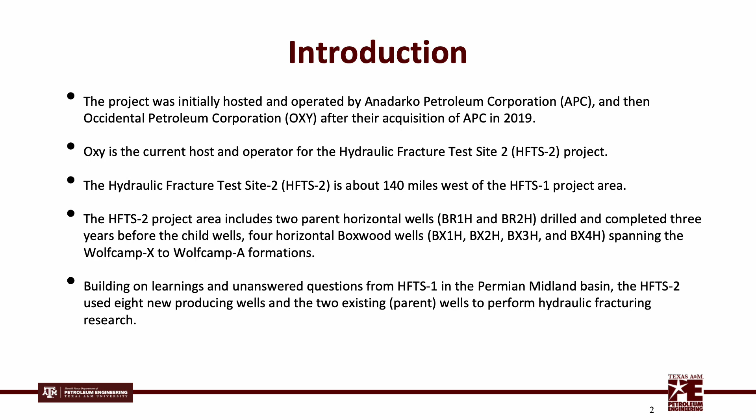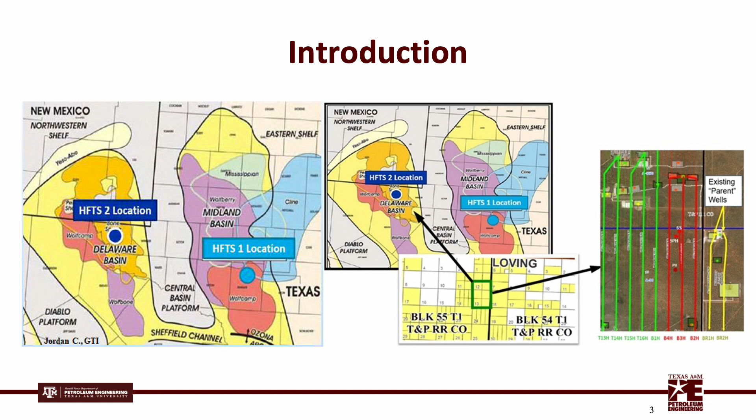The Hydraulic Fracture Test Site 2 project is managed by GTI, with DOE being the primary sponsor and NETL administering and managing the project for DOE and performing specific research. GTI is also responsible for the project and specific research ranging from proppant analysis to data integration. Industry members provide cost sharing to the project in the form of cash or in-kind contributions. Occidental is the test site host and is responsible for managing day-to-day field operations of the test site, including management of vendors and subcontractors for field and laboratory work.

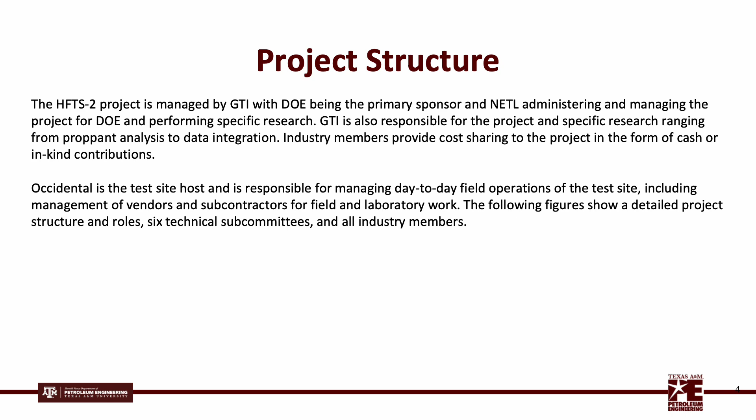The following figures show a detailed project structure and roles, 6 technical subcommittees, and all industry members. These subcommittees were created to provide technical input and direction for specific areas of the project, comprising members from DOE, NETL, GTI, the test site hosts, and all industry members.

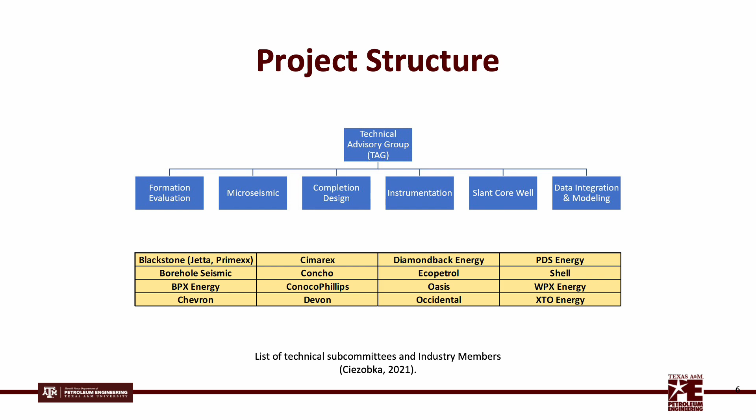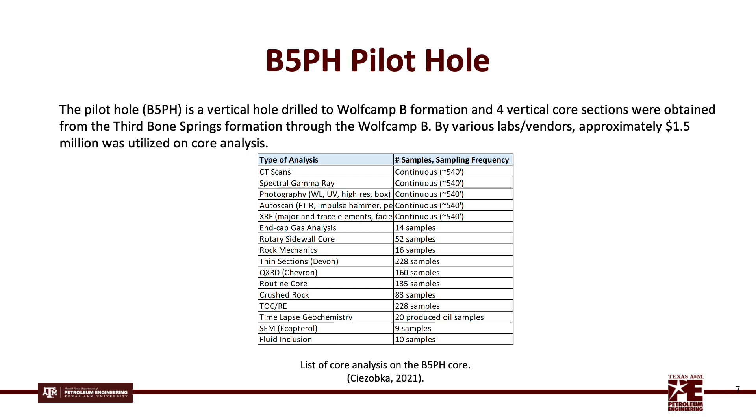The pilot hole is a vertical hole drilled to the Wolfcamp B formation, and 4 vertical core sections were obtained from the Third Bone Springs formation through the Wolfcamp B, by various labs and vendors. Approximately $1.5 million was utilized in core analysis.

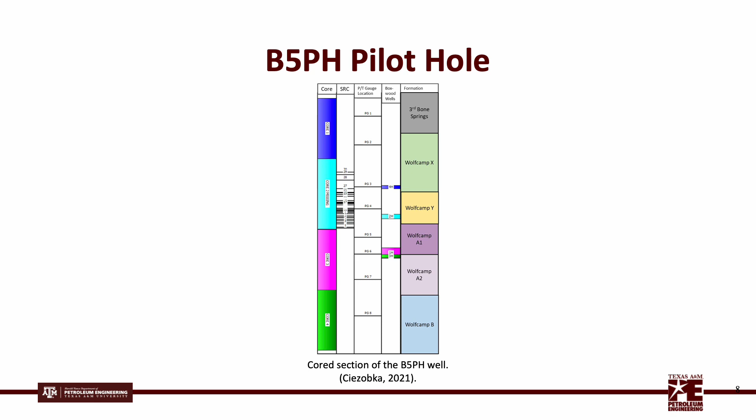This is an image of the depths of various formations and the location of the vertical cores taken in the vertical pilot hole. The location of the cores is the first track from the left. The location of sidewall rotary cores is the second track from the left. The location of PT gauges is the third track from the left, and wellbore locations are the fourth track from the left. The objective of the slant well is to sample the created fractures and to monitor reservoir depletion.

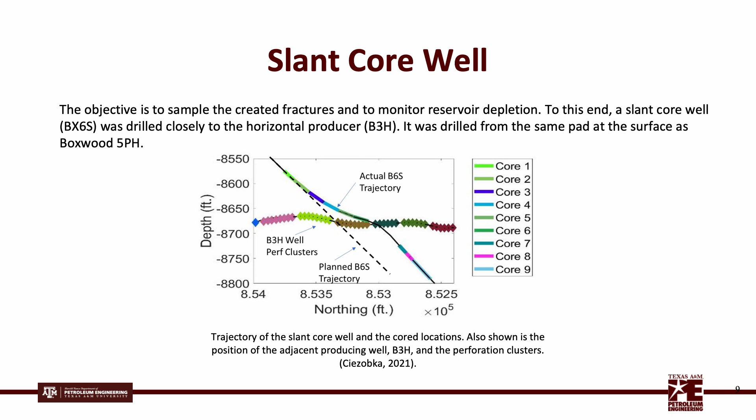To this end, a slant core well was drilled closely to the horizontal producer. It was drilled from the same pad at the surface as the pilot hole. A total of 949 feet of 3-inch diameter core was recovered from 9 core runs in the slant well.

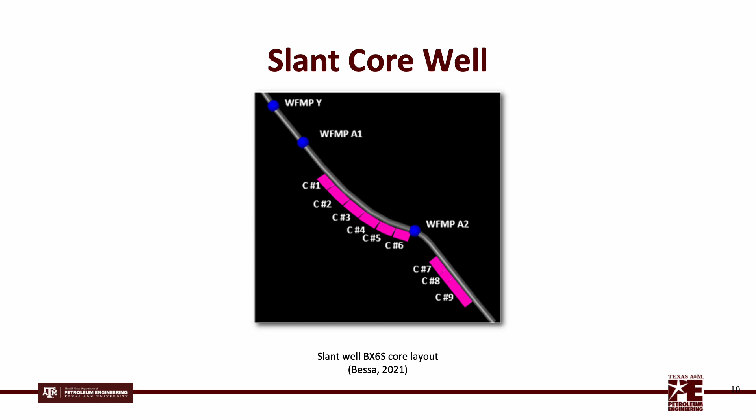Cores 1 through 6 captured rock intervals above the nearby stimulated well, and cores 7 through 9 were from below it. The team followed established fracture description methods as described and deployed in the previous Hydraulic Fracture Test Site 1 project in the Midland Basin.

Hydraulic Fracture Test Site 2 demonstrated advanced FO technologies for stimulation and production monitoring. In the project area, fiber optic cable was permanently installed in 2 horizontal child wells and 1 vertical well. This unique 3-well design enables spatial and temporal hydraulic fracture propagation and production depletion monitoring. This is the first project which utilizes 3 fiber optic wells, including a vertical and horizontal well, to collect FO data.

There are 2 kinds of data obtained from this fiber: near wellbore survey, which measures the response from the activity in the fiber wells, and far field survey, which measures the response from the activity in the offset well.

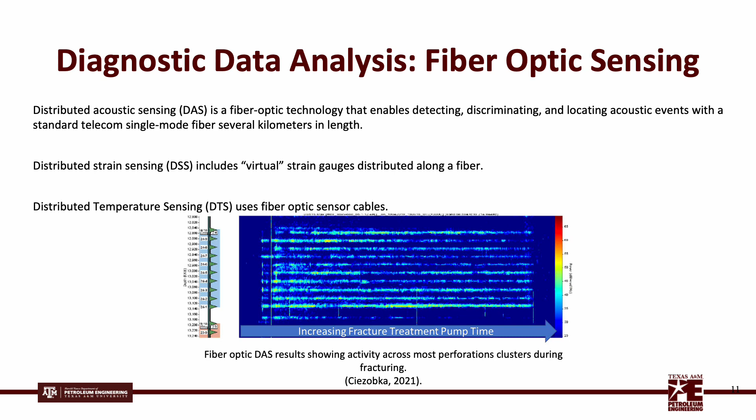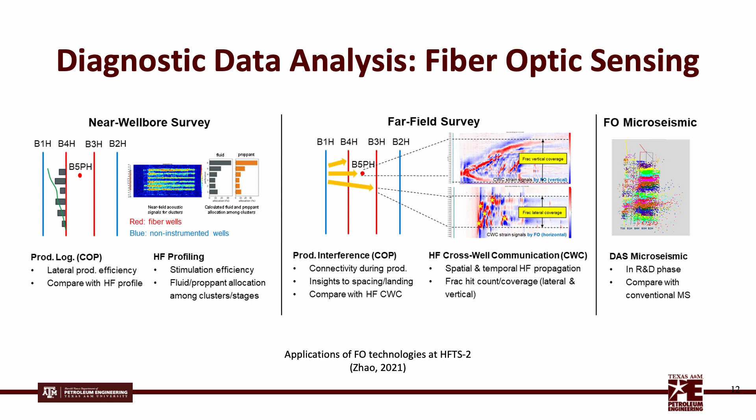Through near wellbore surveys, distributed acoustic sensing and distributed temperature sensing data were acquired during the stimulation of two horizontal fiber wells. Through far-field surveys, cross-well strain data were acquired using low-frequency DAS to monitor response on the fiber wells to activities on the offset wells.

The objective of microseismic monitoring is to estimate SRV and integrate observations with other diagnostic techniques to understand well and reservoir interactions better. The conventional microseismic dataset that was acquired during stimulation of the Boxwood 1, 2, and 4 was

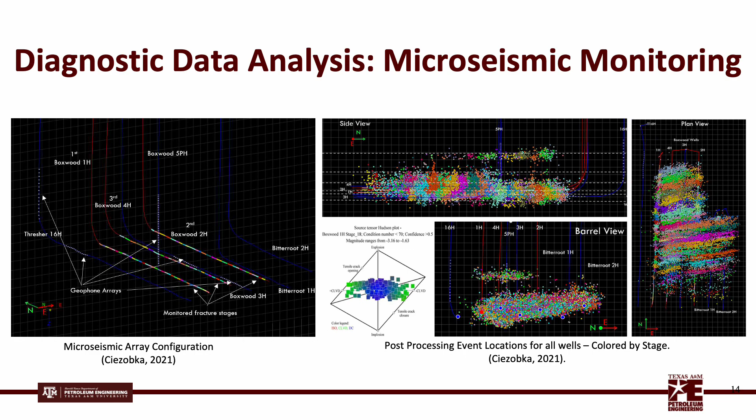The pressure reading obtained in the Hydraulic Fracture Test Site 2 dataset were used to quantify the impact of frac hits and depletion. Analyzing all the gauges during stimulation, we observed that the frac hit severity increases as we go to the shallowest gauge, indicating the preferential upward direction of fracture propagation.

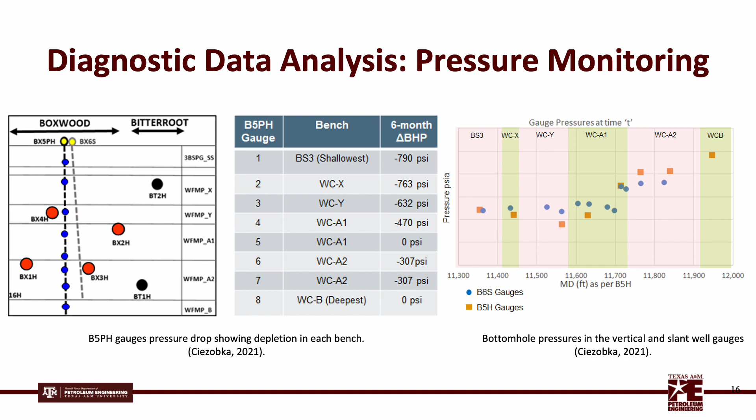The pressure drops seen in the gauges in the vertical well during production show the depletion in each of the benches except Wolfcamp B, which confirms that fractures don't grow downwards. These pressure measurements were confirmed by the measurements from the slant well.

Comprehensive and integrated diagnostics associated with the design of the experiment enabled a unique opportunity to evaluate stimulation distribution effectiveness, evaluate the created fracture geometry domains, and evaluate the effective inflow and depletion domains.

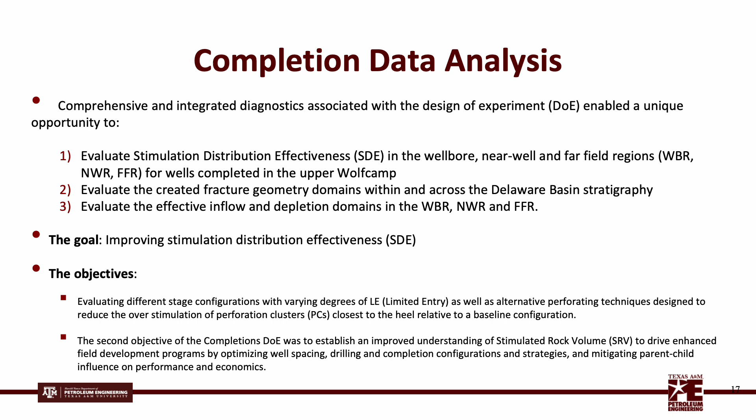The goal was to improve stimulation distribution effectiveness. Based on the statistical analysis of hydraulic fracturing profiles with effective limited entry practices, rate per cluster during proppant slurry placement appears to be a primary completion design variable, rather than rate per perforation, which is the typical default consideration.

Also, based on near-field DAS and DTS data, completion operational issues add the risk of degradation of SDE.

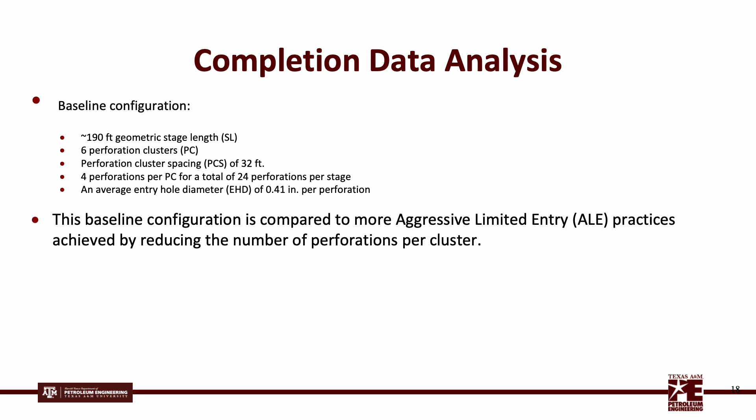Hydraulic fractures for the Boxwood wells are modeled using the ResFrac Pro hydraulic fracture simulator. A black oil model is employed. Wells are created with information from their respective directional survey.

The hydraulic fracture model is scaled down to one stage to be computationally valid, and the fracturing fluid used is a standard slick water with a proppant mixture of 40, 70, and 100 mesh.

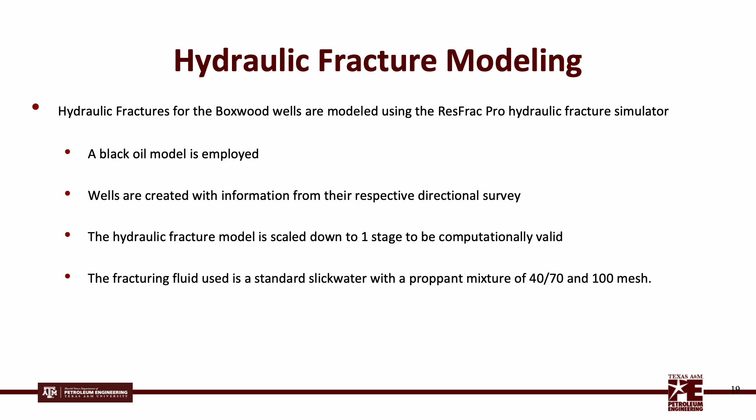ResFrac's simulator is utilized to obtain high-quality results when hydraulically fracturing. It is physics-based and solves the governing equations of fracture mechanics, proppant transport, fluid transport, and geomechanics.

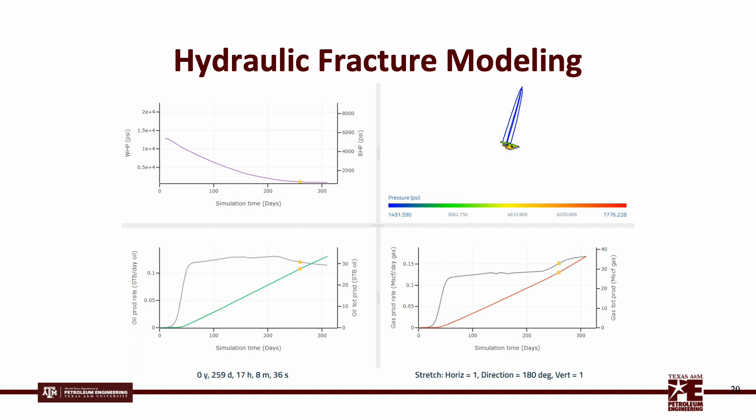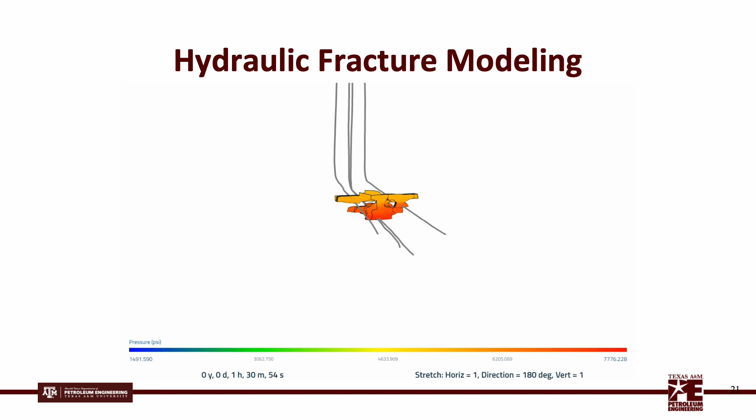It is a true fracture simulator which meshes the cracks as cracks and uses fracture mechanics and equations for transport in a crack. This software delivers more accurate results and better optimization of well performance.

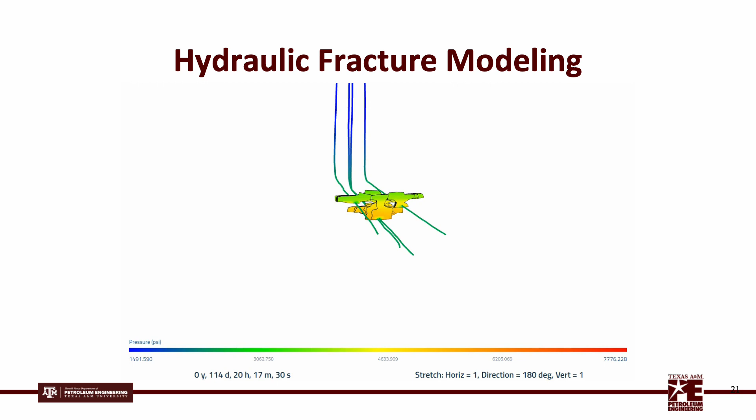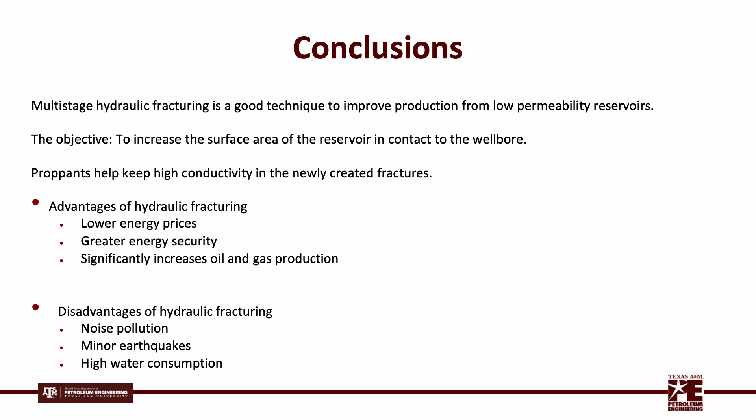Multi-stage hydraulic fracturing is a good technique to improve production from low permeability reservoirs. The objective is to increase the surface area of the reservoir in contact to the wellbore. Proppants help keep high conductivity in the newly created fractures.

The main site-specific takeaways are as follows. Fracture descriptions of the slant core provided a better understanding of geometry and spatial distribution of hydraulic and natural fractures in the SRV. Areal coverage of hydraulic fractures from diagnostics and simulation results indicated connections between child wells during stimulation.

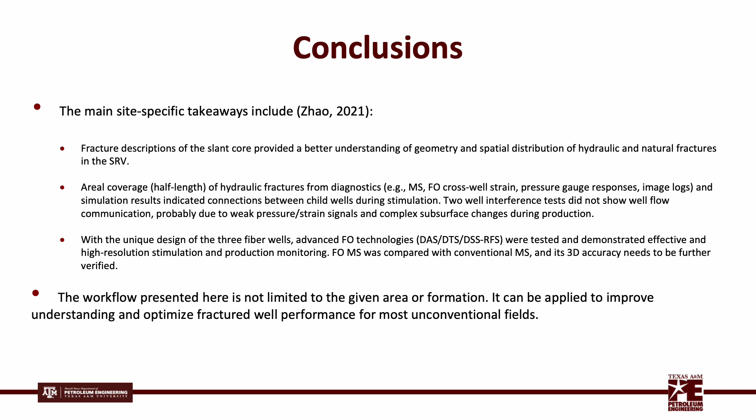The workflow presented here is not limited to the given area or formation. It can be applied to improve understanding and optimize fractured well performance for most unconventional fields.